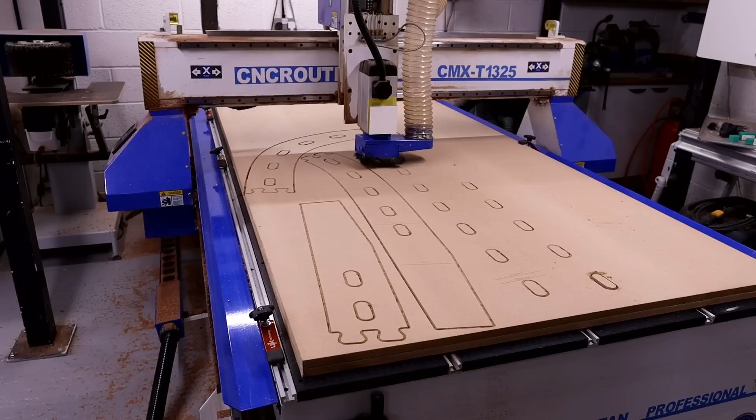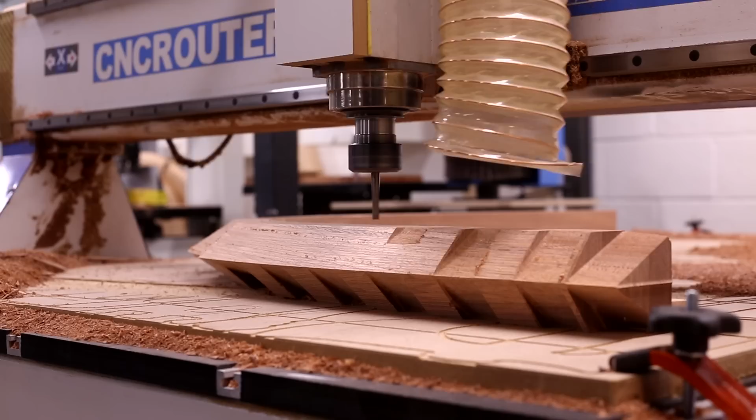We machined all the laminates for it and then epoxied it together on the big CNC cut jig that forms the shape of it. In this video I'm going to be putting this back on the CNC machine, taking it from its stock state here to its completely finished state as it would be within the boat. So it's going to be completely beveled. All the notches are going to be cut into this part to receive the landings for all the timbers that are going to come into the stem at the front end of the boat.

A stem is perhaps one of the most complex components within a wooden boat, and previously there would be a lot of manual work to shape that and to land everything into it. I'm going to attempt to do that a relatively new way on the CNC machine, so we'll see how that pans out. Not quite sure how it's going to work yet. A little bit nerve-wracking to get this on the machine, as there are a lot of hours in just making this lamination, but it'll save a chunk of time if I can get it right. So let's get this beast machined.

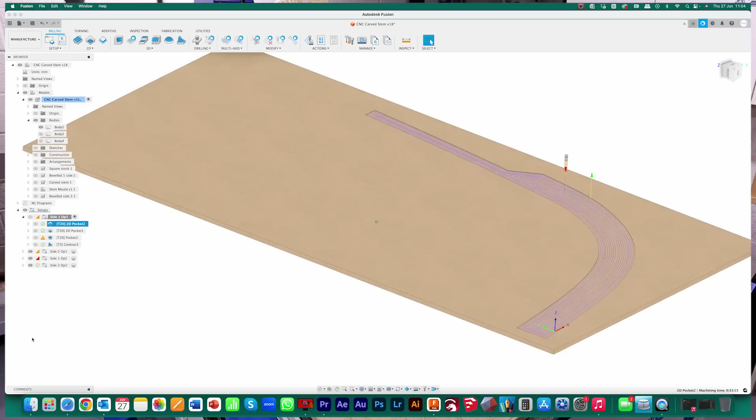Okay, so the first thing to do is to get this part located on the machine so that I can reference all of my tool paths. And the way I'm planning to do that is to cut an outline of the part in my spoil board here. So I'm planning to just lightly score the spoil board here and just create an outline.

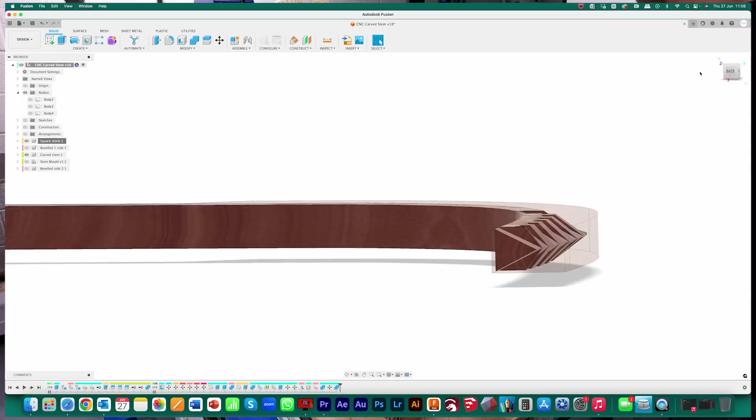What I've done is I've modelled this stock as the lamination is currently, so we can see how that compares to what we're going to get out the end of it, and it means that I can do a proper clearance tool path and machine off all of this waste material, hopefully. So I'm going to do an outline of that stock part in my spoil board, and hopefully that's just going to basically give me a template to locate this part and get started.

Okay, that works. That's got our stem nicely located, and it's just a bit of confirmation for me that I know that the tool path I've created to rough all this out is going to be in the right vicinity. So we've got that located with reference to our origin.

Now I think what I'm going to do, because the back edge of this stem is slightly incorrect due to the spring back in the lamination, obviously I've referenced this here, and the line that's cut on the machine is where the back edge of that stem wants to be, and you can see that we're missing it in a couple of places.

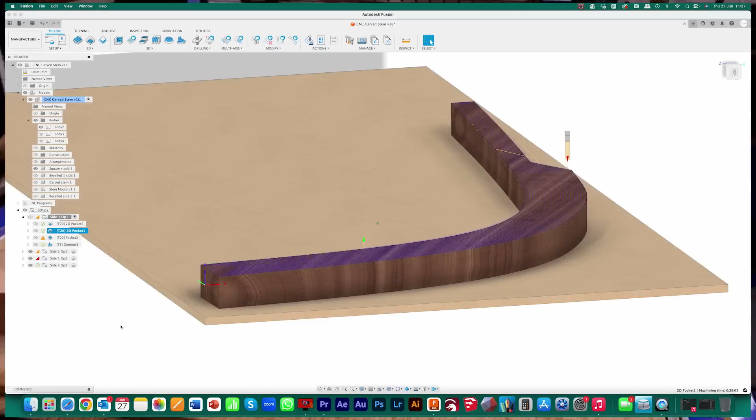So I'm going to do that, and we'll run the first op. So the first operation here is going to be a facing operation to flatten out the top face of this and just bring me down.

Basically the whole first side operation isn't actually that critical on its height and its position, because what I'm going to do is then I'm going to do another reference cut when I turn the stem over, and that's going to be the second operation. Second side operations are going to be the sort of critical thing for defining the final width of the stem and getting things exactly correct and aligned with the two sides.

So the first side operation has a little bit of leeway. When we get to the second side, we want it to align with the first. That's what I think anyway. So I'm going to get this screwed down with some little blocks. We'll run the facing op and we'll see what happens.

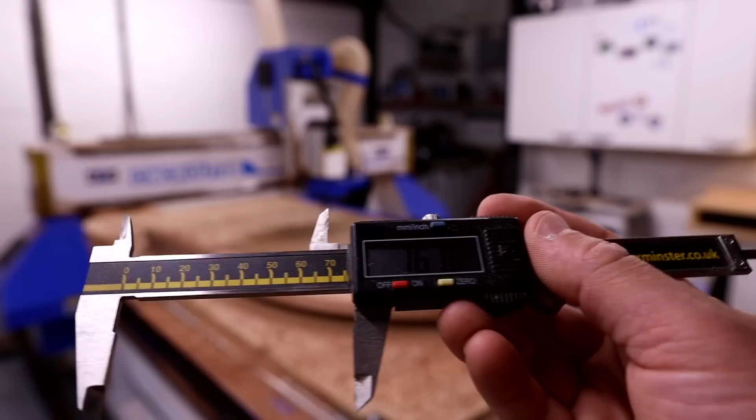So we're currently at about 79 millimeters, and we're going to need to finish at 76. So this is going to be about a 3mm pass, I think, and I hope. Let's run it, see what we get. What have we got? Can't complain at that. Very nice.

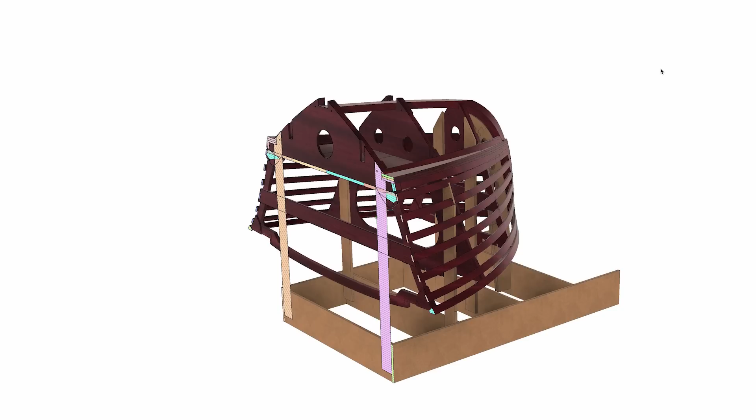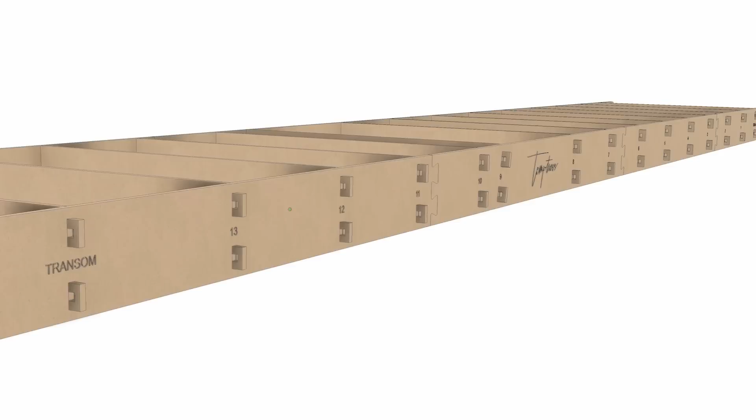So what I think I'm going to do in the next video is actually a mock setup. So I've got the stem now, I've got frames 1, 2 and 3 as well, and I've been working on a new strongback system. There's going to be a CNC cut strongback that I'm going to use with my boat, and that's actually going to allow me to build just the forward end of the strongback. So I think what I'm going to do is build that, and we'll see the setup process for aligning the stem and the first 3 frames within the boat.

That's going to be a good opportunity for me to start to see how some of these CNC carving operations that I've done will actually work out before I roll them out throughout the rest of the boat. So we'll be able to do a sort of test landing of some of the chines and the topside battens, things like that, and see how all of this works. Hopefully it does, and I haven't just wasted everything that I've already made on the boat. So that's what's coming up in the next episode.